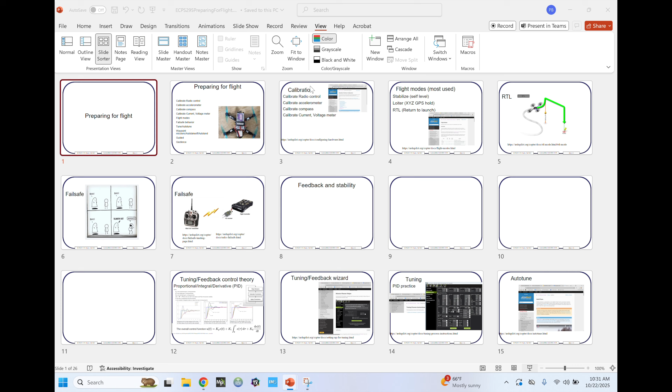As I've mentioned, you've done the hardest hardware part with all the soldering. That's done. You've done the hardest software installation part with all the radios. That's done. So the rest of the practical part is assembly and flying.

Today we're going to discuss the details of preparing for flight and the theory of feedback. So it's two very different important theoretical topics: one theoretical, one practical.

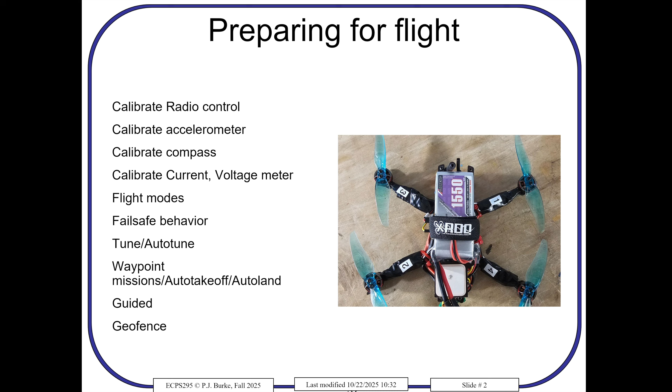These are things you have to do to prepare for flight: calibrate the radio control, calibrate the accelerometer, calibrate the compass, optionally calibrate the current and voltage meter. You need to understand the flight modes, the fail-safe behavior, the tune, how waypoints and auto takeoff and auto land work, guided mode, and geofence. So that's the topic of today's lecture, going through all those in theory and in practice.

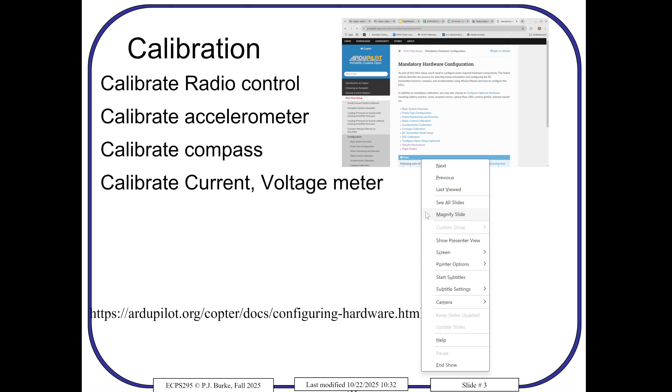So the calibration, let's do that first. I guess I can end the show, and we can go ahead and calibrate the drone.

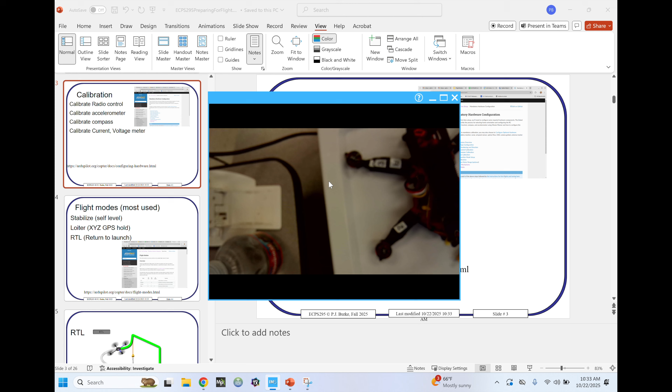I'm going to walk you through what you have to do to calibrate everything. Hey Peter, welcome back. Disarmed. So we have the radio, and the camera's not that important at this point—it's more for demonstration purposes. So the camera, and you do this with the props off.

So there we are, booted. Telemetry connected. And what's the first thing that we want to calibrate? The radio. So I'm going to go to Mission Planner.

Takes a moment to get everything ready. Oh, I have to plug the drone in, of course. So I'm going to use the USB connector that's connected to my laptop. Make sure it's a data cable—if it's just a charging cable, it won't work.

Now we should be able to connect to Mission Planner. Just to be sure, let me check something. I can go to Device Manager, look at the COM ports, and there we are, ArduPilot COM3. So we're good to go on COM3, connect.

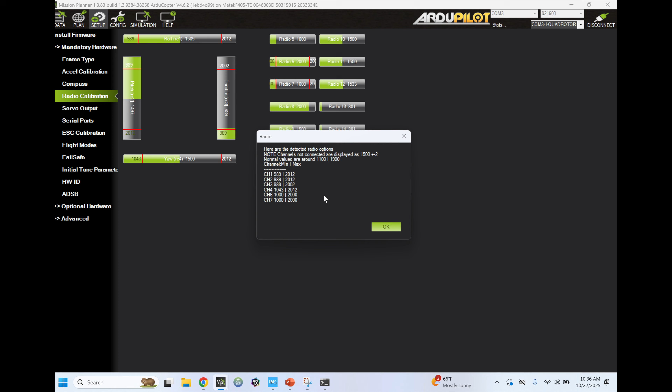That's less important in autonomy, but if you ever fly where you really care about every last 0.1% of the end of the range, you calibrate the radio like that. So for completeness, we calibrate the radio, and we're done—here's the min-max that it found.

One small piece of advice: the trim—here's the throttle, I can bring the trim down. Minimum trim reached. Trim center. Minimum trim reached. So there's a trim on all 4 controls. For the purpose of this class, trim center.

I would suggest keeping them centered on your radio, and you won't really need to worry about it because it's autonomous—it has stabilized mode. But the throttle is one special case where sometimes the throttle isn't quite at zero when the radio turns on or when the drone turns on, and the software gets upset. So you might have to use the trim to bring the throttle slightly down, because for safety it doesn't like to arm when the throttle is not at zero. So that's the first calibration.

The next one is accelerometer. This is simple: which way is up? When you move the drone around, you need to calibrate which way is up, since your flight controller may not be mounted perfectly flat.

So the way that's done is you go to Setup, Accelerometer Calibration. There are two you can do. One is level, where you hold the drone level and it calibrates level.

Then it says place vehicle on its left side. The more accurate you are, the better. I'm doing it quickly as a demo, but you want to find something square, a flat table, a book, or the side of an oscilloscope, and do your best to get it exactly on the left side.

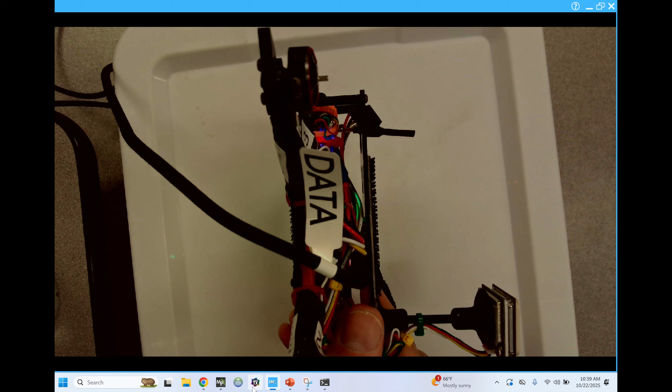You do that with all the orientations. Now I have to put it on the right side, and so on. That's done. Nose down, done. Nose up.

This is going to be a horrible calibration because I'm doing a real quick and dirty job. Calibration successful—but I'm going to recalibrate it carefully. Calibration successful. So that's the accelerometer.

Now your parameter file will change. If you download the parameter file from Canvas, you're using the calibration I did a long time ago. So always save a copy of your parameter file after calibration as a backup.

Compass is the most difficult one in practice. Compass allows you to determine direction—we can go back to Mission Planner and pick up a picture here. You can see on top, when I rotate it, it tells me east and west. That's being done by the compass measuring the magnetic field of the Earth, just like a compass you use hiking, where a needle points north. It's detecting the magnetic field on this chip.

That's why there's this standoff. Last year we had the GPS and compass mounted right here, and when you throttled up, the current created a magnetic field larger than the Earth's magnetic field. It was really difficult to get the calibration working, even when the current wasn't there. So make sure you use this standoff in the lab.

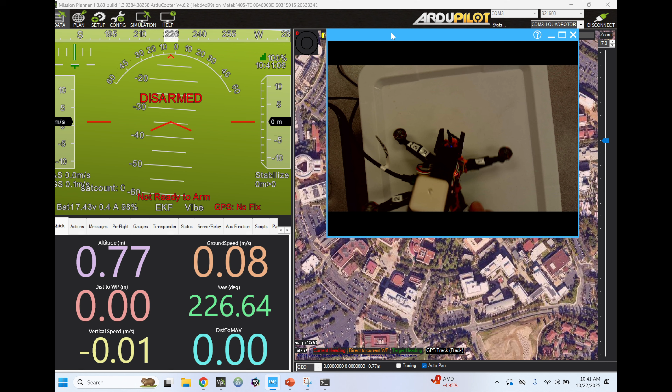So the compass calibration—where'd it go? Here. What you have to do is rotate the drone around. Compass calibrator, cannot start compass thread. There's a problem here. Let's see, well, it's still working. There's an error, a problem, and I forgot what it is.

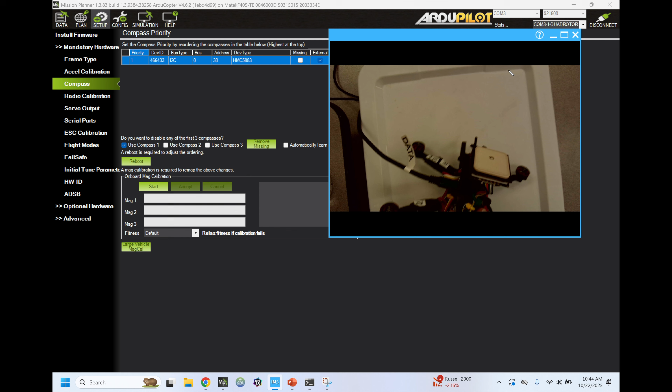I'll solve that later offline. We had this last year and I forgot the solution—it's something to do with memory. But when it's solved, you have to rotate it around roll, pitch, and yaw several times, and it will correlate the compass measurement with the accelerometer measurement, giving a calibration of compass XYZ versus accelerometer XYZ. So things don't always go according to plan, and even now there's a problem. But I guarantee if you don't keep the compass far away from the motor, there will be a lot more problems. That's calibrate compass.

Now the next one is calibrate current and voltage. In your flight controller there's a 50 milliohm resistor—you can see it right there. That's how you determine current: the voltage drop across that resistor. Actually it's 25 milliohms, even smaller.

So if there's 1 amp going through there, how many volts are there? There's 1 amp going through a 25 milliohm resistor—how many volts are there across that? V equals IR: 1 amp, 25 milliohms. What's the voltage?

25 millivolts, so it's 0.025 volts. Now, in a typical op amp, you'll have an offset of 1 millivolt. So an op amp tries to make the output adjusted so the inputs are at the same voltage, but it's not exactly perfect. So most analog circuits have offsets of 1 or 2 millivolts.

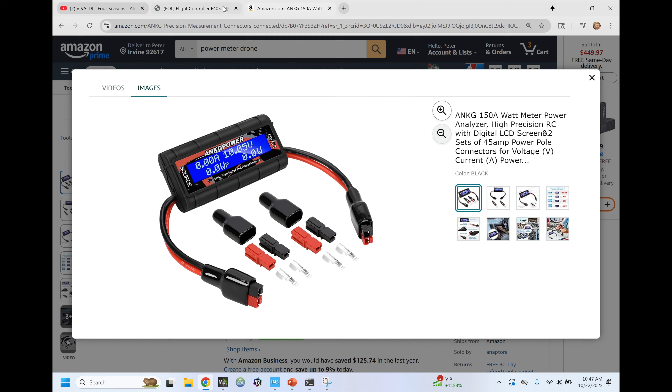And then in Mission Planner, there's a setting, config, which has to do with the current offset, and there's another setting, I forgot what it is, current related. Okay, I'm not going to Google it.

What I'm going to do is look at, I should post it on our Canvas website. So last year we created a file that explains how to do it. Let's see if I can find that file. No... Calibration. Oh, well, here's a calibration file that explains accelerometer calibration, but that's not what we want. We want the battery calibration file.

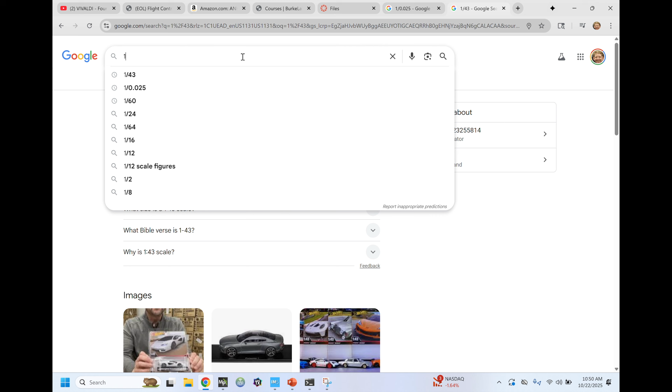So it'll be 1 over 40. So it should be 40 if it's 25 milliohms. And mine is 43, so my resistance on my drone is not exactly 25 milliohms. My resistance is 23.2 milliohms. So this file on Canvas shows you how to get that, and then there's the offset also, which I have ideally at 0, but I have it as 1.3 millivolts.

So your drone will be different. You have to run the drone at different currents and make a table of calculated versus actual, and that'll give you the slopes and the offsets. And here's a procedure, a step-by-step procedure for how you do that. Okay, we use ChatGPT for that, or you can figure it on your own. So this is optional, but if you don't do it, your current reading is going to be wrong. It's not really critical for flight.

Yes? I have two questions. The first one is they assume the voltage is proportional to the current consumption. Right, so that's how they calculate the current based on voltage, right? Right. And another one is, where is that?

Well, I can answer that one. So they're assuming V equals IR, which is probably very close to being true for this device because it's a big resistor. Why do they need that big resistor?

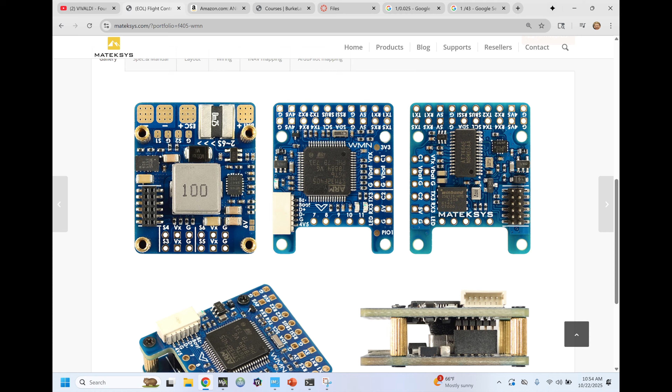By the way, here's the video chip I told you about last week, the Max, it's analog now, the one that does the HUD on it. Okay, another question is, can I use a...

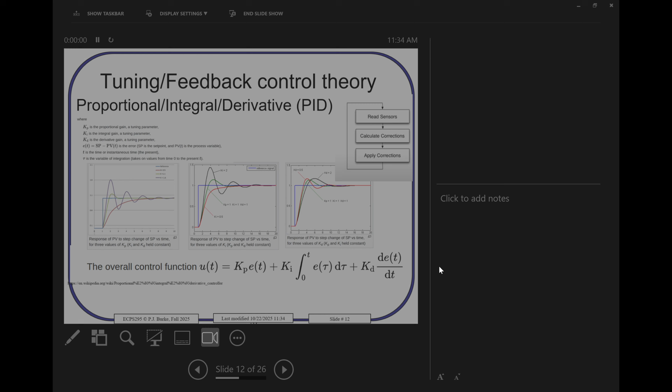So you already told me a good way of adjusting the P term, the proportional term, in order to minimize oscillations. It's to make that smaller, just adjust the gain term and bring it down. And you can do the same thing for the integral and the derivative gain terms.

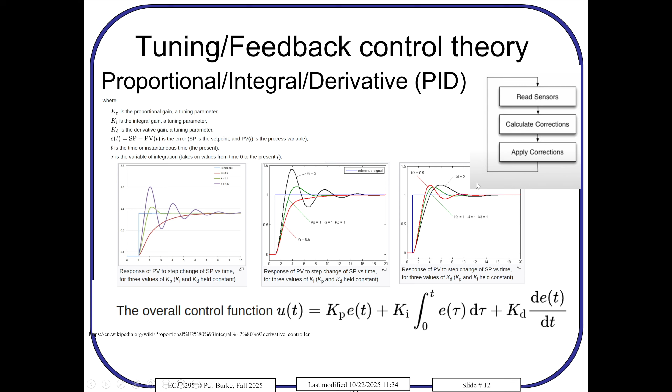You can plot mathematically and analyze it in classes how it looks, and there are optimal values for that depending on the response function of your system. It turns out that ArduPilot devs are quite intelligent, and they have the PID terms suggested for small, medium, and large drones.

In the interest of time, we won't delve deep into Mission Planner, but there's a config tab, extended tuning here, which has the PID for roll, pitch, yaw, velocity, throttle response. You also may want a particular velocity response. So there are multiple PID loops within ArduPilot, and you can tune all the parameters in Mission Planner.

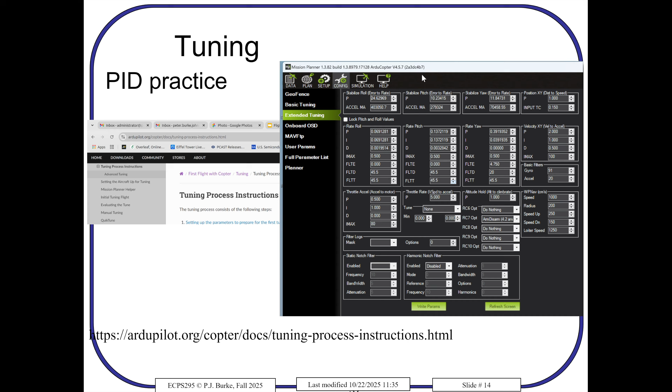So they have a wizard that suggests the setup for small, medium, and large drones, because small drones are very responsive and large drones are very slow to respond. However, you don't know, so it's even better: it has this great feature called auto tune, where it will actually measure the response function.

So you take it up in the air, and this is one of the flight modes, and it will give it a sharp impulse response and measure how long, with the accelerometer, it takes to get to where it wants to go. It'll do all that in X, Y, and Z. It takes about half an hour or 20 minutes. Each time it adjusts, it measures the response rate, adjusts the PID, then gives it a new pulse, doing this in yaw, pitch, and roll, and eventually you get a nice tune.

So I did that with my drone, and I'm giving you the parameters. They should be pretty close to the same for your drone. That's a beautiful feature of ArduPilot.

Last year, the stock parameters we used for the small drones did not work because you would take it off and it would oscillate, and it would almost not fly. It was feedback. So there's also a suggestion in ArduPilot to manually just cut all the gains by half.

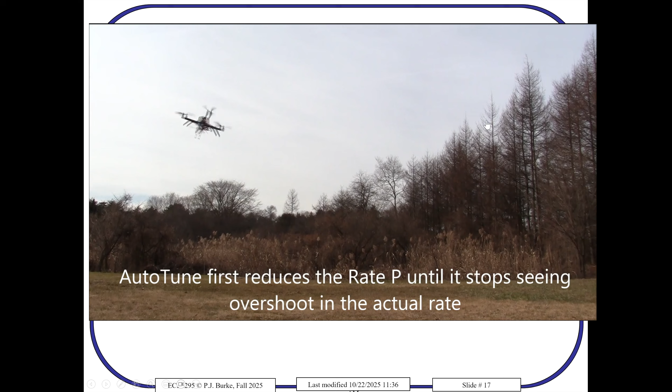What's the bad news if we cut all the gains by a lot? What's the negative? It'll take forever to get there. If you make the gains really low, it might take 10 minutes to get to where you want. So it's a trade-off.

We don't need to watch the whole video.

Now there is one more theory, which is Kalman filter. So somebody asked what it uses, GPS or barometer. It uses all of them, but it can't use the instantaneous GPS.

Because for any given measurement, you get one reading per second with GPS, and 50% of the time it's within 1.5 meters of correct, 50% of the time it's outside of 1.5 meters. So if you have a drone sitting on the ground not moving at all, half the measurements will be 1.5 meters away from the other half. The GPS location will be jumping around every second even though the drone is perfectly still.

So you can't have a feedback loop that uses that state estimate, just the GPS. All sensors are noisy. So the Kalman filter is a theory that takes the noise, averages it out, and does it for all the sensors that you have. It provides what's called a state estimate of the system.

There are weights for the different components that you can tune in ArduPilot. I've never had to mess around with them much, although we did for the flyaway, and the ArduPilot developer helped me with that. So that is the Kalman filter.

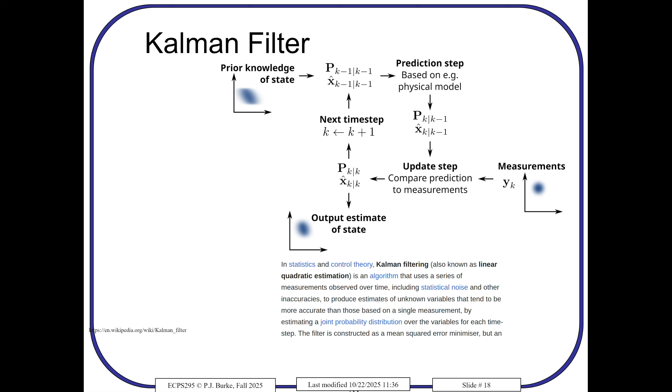That's also built into ArduPilot. Basically it's a moving average of all the sensors to give you what's called the attitude heading reference system. So your location that the ArduPilot thinks you're at is not the instantaneous GPS location, it's not the instantaneous barometer location, it's some time average of all those.

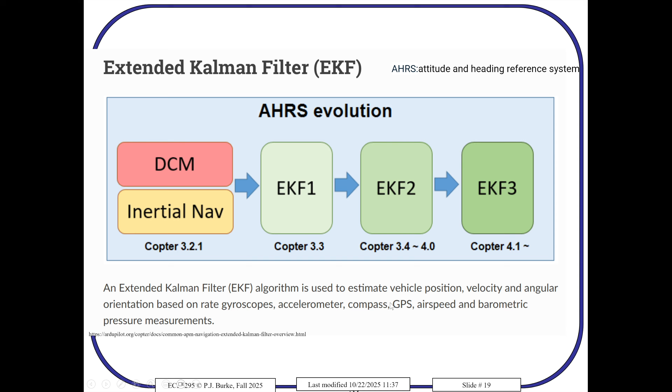So you asked what sensors: gyroscope, accelerometer, compass, GPS, barometric pressure. Some of them have airspeed, you're going to have LiDAR, you're going to have optical flow, all of those and anything else can all be integrated in. So that's the other theory.

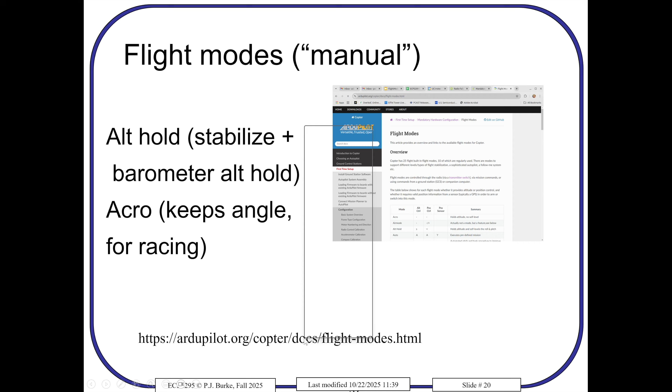Okay, theory over. 10 minutes left for the other flight modes. Let me see what we have left for the modes. What I'd like to do is use the whole time and get through everything.

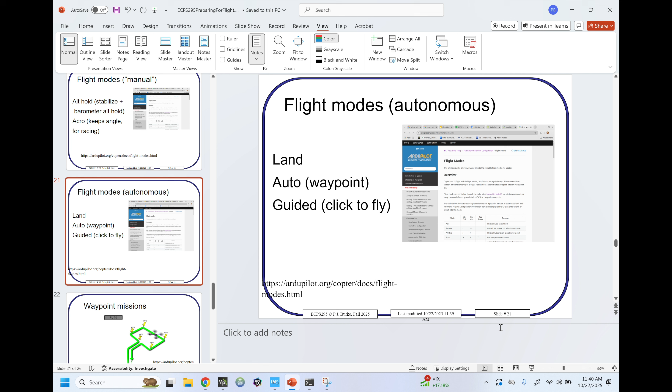So like I said, there are other flight modes. One of them is land, where it just goes into land mode. There's a preset land velocity which is in the parameters, just use the default and it'll land where it is. There's auto mode, where it'll do a waypoint mission. So if you put it into auto mode, it'll start flying to all the waypoints that you have pre-programmed.

And then there's guided mode, where you click on a map and it'll fly there. These are some of the interesting autonomous modes you can use. They won't work with the controller. So when you do your final mission to get credit for this class, you're going to have to use the mission planner to set it into auto mode.

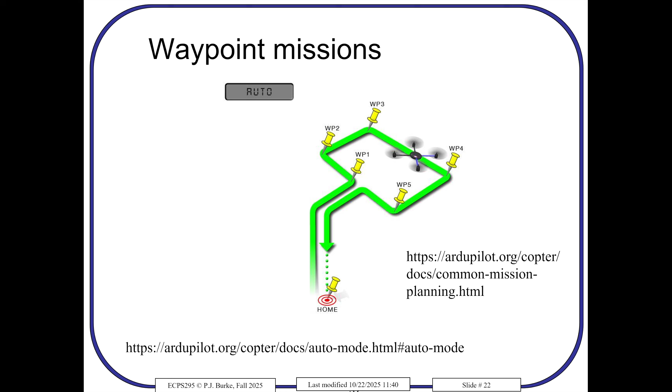You pre-program the waypoints into the drone, and there's a video on how to do that. It's pretty easy: you click on the map, upload it, make sure you get it right so it doesn't fly all the way to Timbuktu. But if everything's correct, you press auto mode and arm it, and it'll automatically take off, fly the waypoints, and land. So the only way to get it into auto mode is to do it through Mission Planner, and that's your goal for the class.

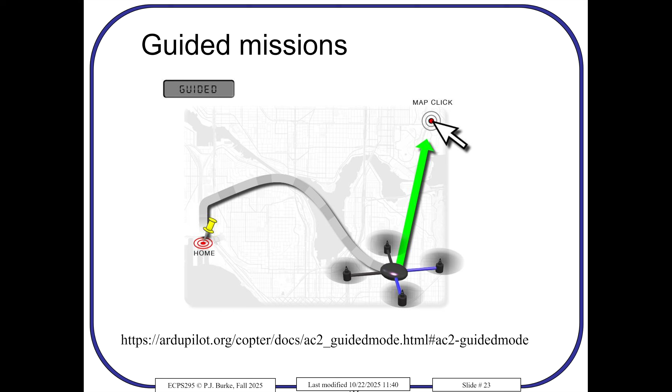Guided, you just click on a map. So if you're connected on Mission Planner, you can click on the map and it'll fly there. It's a pretty neat feature. You click on it, tell it the altitude to fly to, and it goes there.

Jack was asking why you have all these radios. I really like Mission Planner, I like the autonomous nature. Some pilots like just to fly manually, so you do you.

Geofence, let's see how many slides we have left. Yeah, the geofence, and then we're going to do the checklist. So I actually have 9 minutes, I'm going to use them all.

So geofence is what it says. You draw a fence, and if the drone goes beyond that fence, it automatically takes some corrective action, which is predefined by you.

You need to define the geofence before you fly. I require that as a safety measure. And the flyaway that we had, the students told me that they had a geofence, and I looked at the log files and they did not have it enabled. So we have to be pretty strict about that. Make sure it's enabled, so that if the wind blows it away, or the radio control gets lost, or it's programmed wrong some way, you can have a geofence.

And I have it set to auto land, so if it goes to the geofence, it'll just land, and then you go get it. So make the geofence within the ARC. There are a couple of videos on the geofence and how to set it up. Now, I told you how to fly in the cage.

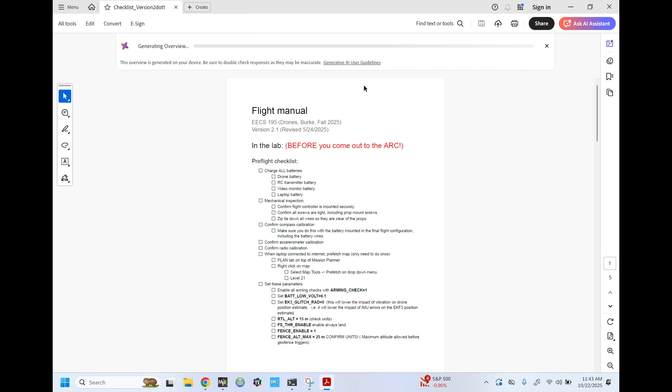So it's a checklist, and I've created this pre-flight checklist for you in response to having taught this course several times and seen things that can go right and go wrong. The first one is, before you come out to the ARC, have all these things done: batteries charged, make sure everything is screwed on tight, etc. Two pages of it. We're going to go over that in a minute.

And then the day of the flight, this is a safety protocol. This is the crew briefing, and I want you each to sign your name and state your role. And then these are your missions: take off, loiter, arm and loiter, check the RTL, check the fence, and then do your waypoint missions.

Since we have about 6 minutes, let's go through the checklist in more detail. Before you come out to the ARC, one of the reasons we may not have a lot of time this year is we'll see how much time they give us. It might rain, and if it rains, we can't fly.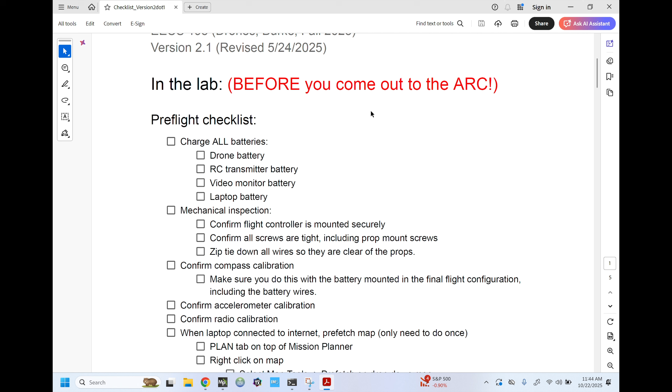So I can't guarantee the weather. Make sure that when you come out, you don't have to spend an hour or two fiddling around. It's ready to go, so do it. It's also hard to do troubleshooting out in the field. It's sunny, it's windy, you can't read the monitor on your screen.

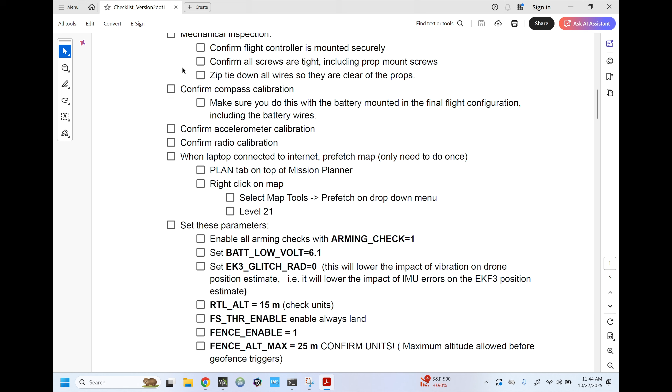So it's really hard. Charge all the batteries, do a mechanical inspection, confirm your compass calibration, confirm the accelerometer calibration, and check each one of these on a piece of paper. Then make sure you prefetch the map, because if there's no internet, you won't have the map.

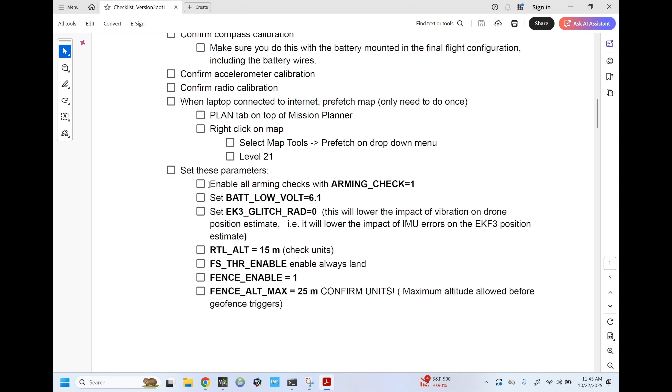And then these are the parameters: arming check 1, battery low voltage 6.1, EK3 glitch radius 0. This will minimize the impact of vibration on the drone's position estimate, and it will lower the impact of IMU errors on the EK3 position. This is what Tridge, the lead developer, told me to do, because we have super high vibration drones.

They're tiny—these are the smallest ArduPilot drones ever made by humankind. Most ArduPilot drones are way bigger, and I'm the only one, as far as I know, making these teeny tiny ones at any scale. So ArduPilot got confused because of all the vibrations. That's another reason you guys don't like that sticky tape, but it's really soft—it's a nice vibration isolation between the accelerometer and the propellers.

What we think happened with the flyaway is there was too much acceleration, too much vibration of the propellers. It translated into the accelerometer and got rectified and down-converted, and that confused the height estimate. So when it thought it was going down, it was actually going up, so it gave more throttle, and the feedback loop was unstable because of mechanical malfunction.

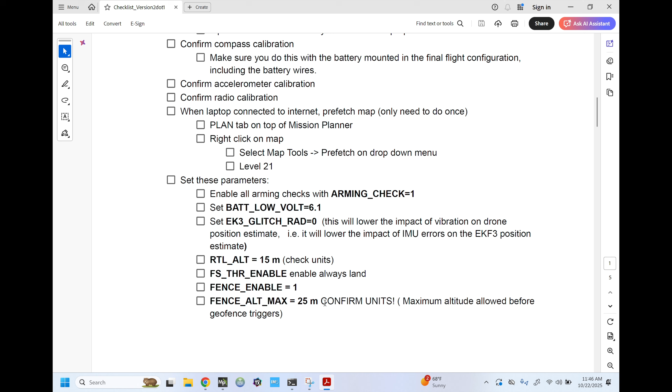Return to launch altitude 15 meters. Check the units, fail-safe throttle enable always land. Fence enable on, fence alt max 25 meters. So if it goes above 25 meters, that's also a geofence breach.

Fence action: always land. Confirm the fail-safe behavior by turning the radio on and then off, make sure it goes into fail-safe. Enable sound in Mission Planner. This is part of your radio checklist. Turn on sound all the way up on the laptop. Make sure you set up the FPV video, which we talked about.

Set up the waypoint mission on the bench. Don't go out there and set the waypoint mission up directly. There's a video on that. Set up the geofence on the bench as well.

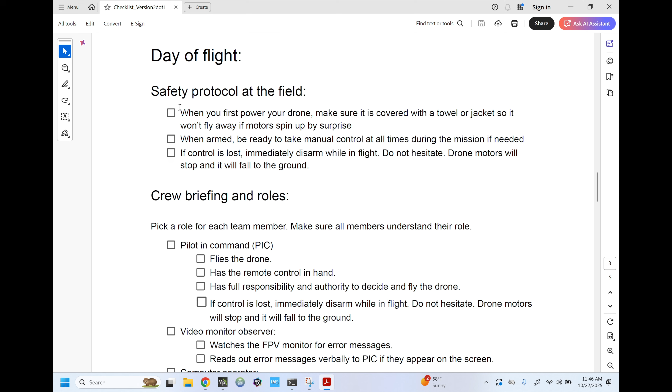Okay, we have 4 minutes left, I need them all. So the day of the flight, check everything out in the field. Be ready to disarm at any moment. Do not hesitate. If something goes wrong, just immediately disarm, period. We'll figure it out later.

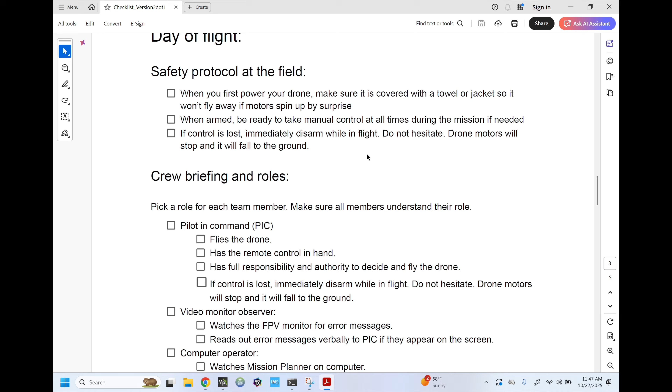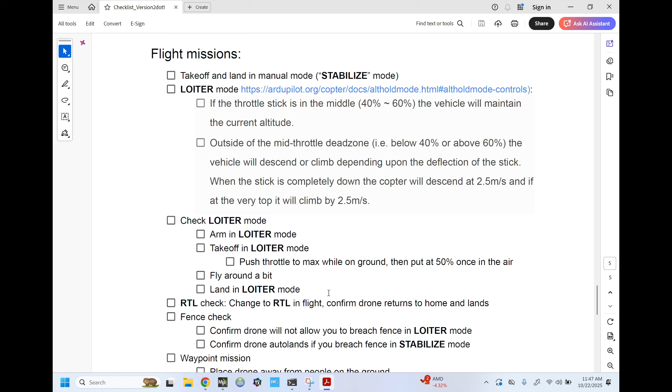These are the crew roles, which we'll get into later in the interest of time, because I want to also do the arming. And then you do your missions, which we'll skip for now in the interest of time—we introduce you to it gradually. So one thing I want to do before the end of the lecture is talk about the arming conditions. I do need the radio.

Welcome back. Disarmed. Return to home. Another thing—Tridge was quite upset with me because I had disabled all the arming checks. And he said when they get log files, they just...

Mode change to stabilize. And if he sees in the log file that they have the arming checks disabled, he gets mad and throws it in the trash, because they spent so much time on all the safety.

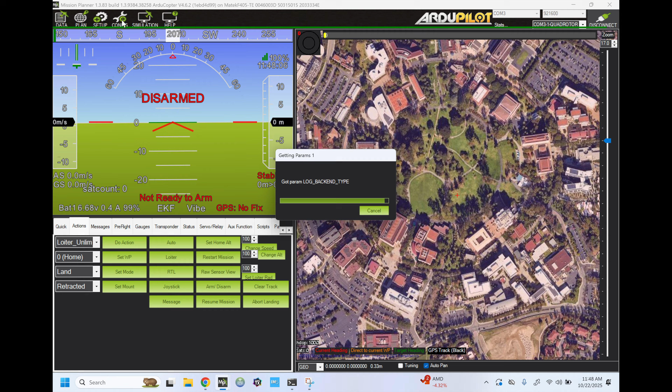So if I try to arm it—mode change to stabilize—it won't arm. Arm: requires fence position, requires position. So if you don't have GPS, you're going to want to fly it in the cage without GPS.

Battery low, GPS. So there's the arming checks, and right now we have them all enabled. Let's see if we can change this. That means if you don't have GPS locked, you can't take off.

What we can do is the opposite, which is turn them all off. So how do I make that zero? Now there's no checks. It will arm, it won't question you.

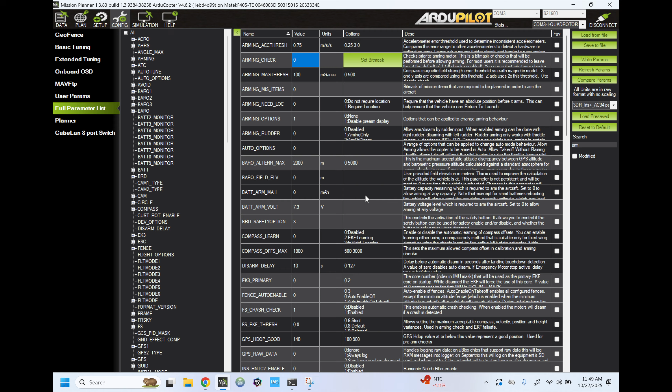So you can do this in the drone cage, or you can do it selectively. You can say, okay, I only want the barometer. So let me turn them all off. Write the parameters. And that means I'm ready to arm—I'm happy. I usually have to reboot the flight controller when I do this.

Armed. Disarmed. Armed. Now it'll arm. Disarmed. Okay. Mode change to stabilize. Armed. Warning, arming checks disabled.

Armed, and now I can fly. If I had the props off I could fly it around now. So be very careful when you change those arming checks. Please have them all enabled out at the arc. But when you're flying in the drone cage, you can disable GPS lock.

But I would probably keep all the other ones there, assuming we have them all—that we do. The only thing we don't have is GPS, like battery level. So let's see if that's going to work. Write parameters. Yes.

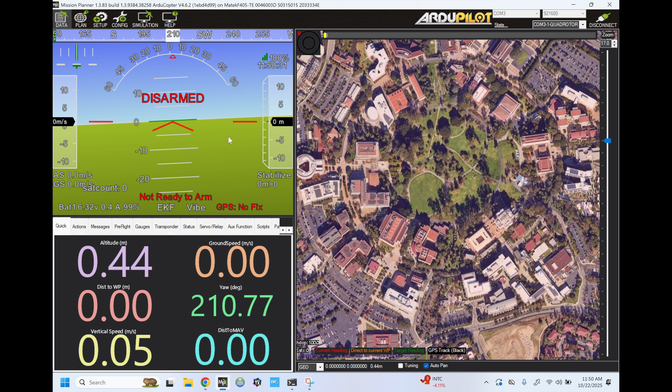And now it doesn't want to arm. Battery 1 below minimum arming voltage, and fence requires position. Oh, my battery is 6.32 volts—that's really low, I'm almost out of gas. That's like 5%. Okay, well...

Board voltage, battery level. Arm: fence requires position. So I have to turn off the fence. Geofence.

Disabled. Write parameters. Yes. Ah, now he's ready to arm—or she. Armed. Okay. Disarmed. So you can adjust the arming parameters at will.

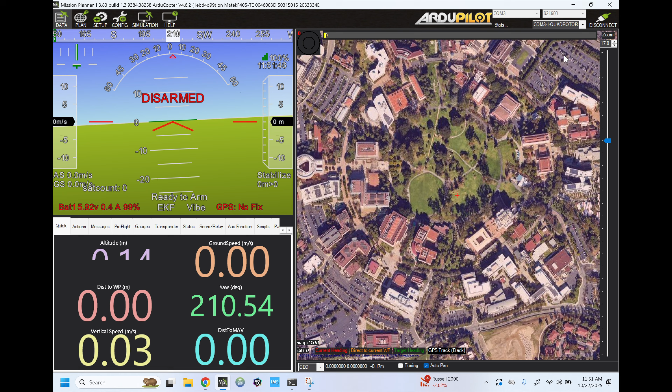Please use your discretion—if you have questions, ask me. If you're in the cage, the worst that's going to happen is your drone gets crashed. But if you go outside the cage and you want to start playing around with the arming parameters, please be very careful. It's best just to leave them all on. Make sure you get GPS lock. Okay, so happy flying.